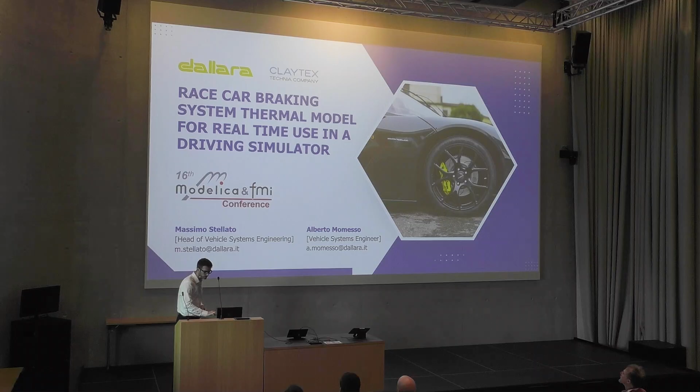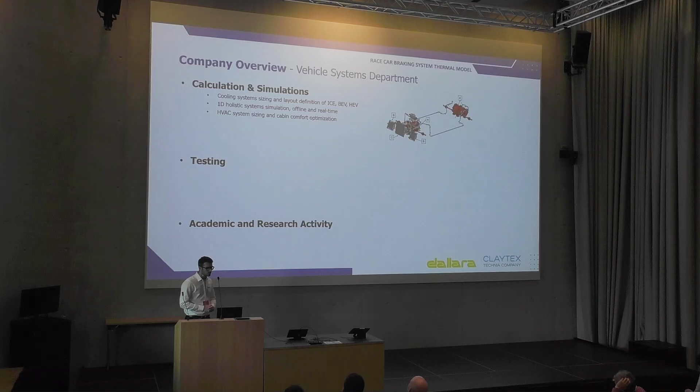So I work as a vehicle system engineer. We are mainly focused on 3 activities: calculation and simulation, testing, and research activity. For the calculation part, we mainly perform 1D holistic simulation to define the layout of the cooling system for each type of car. Then we have additional work, HVAC system sizing. Of course, the reason that I'm here, 1D brake cooling analysis, and then some 3D analysis using meshless software. Here, for example, there is a tank sloshing analysis. And lately, we also started to make some driveline torsional vibration analysis.

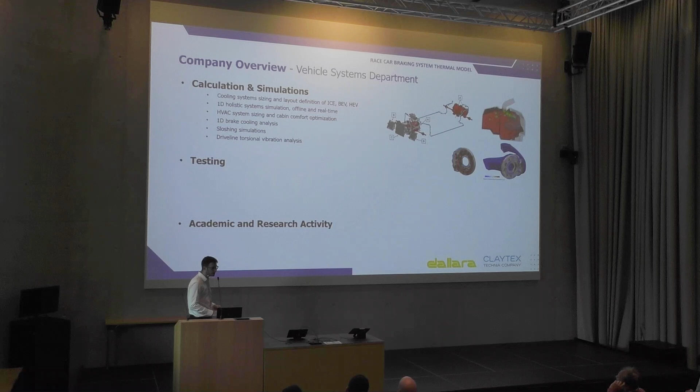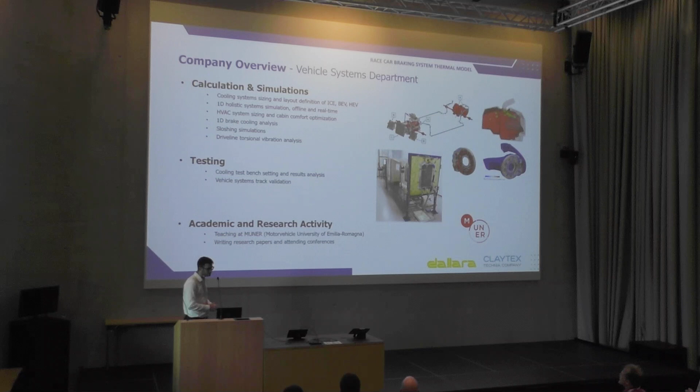For the testing part, in Dallara we have our cooling test bench, so we can perform for external customers performance measurements on water and oil radiators, and then, of course, we make some track support, track validation. And for the academic part, we teach some lessons at MUNER, the Motor Vehicle University of Emilia-Romagna, and we also write some papers and attend conferences.

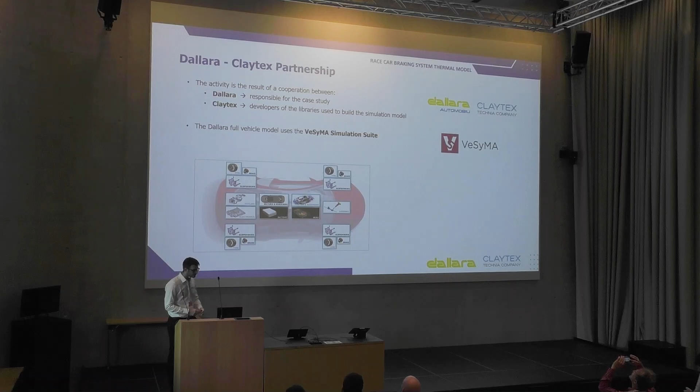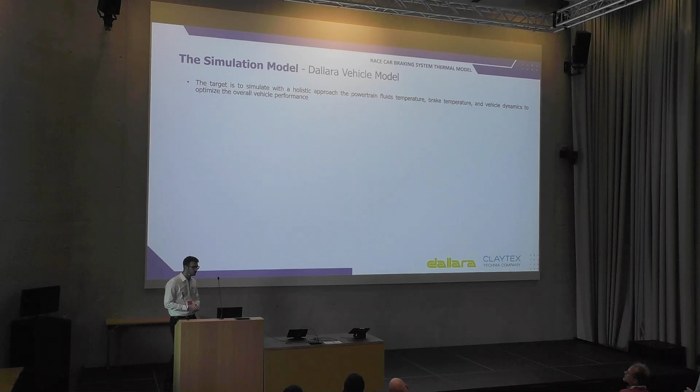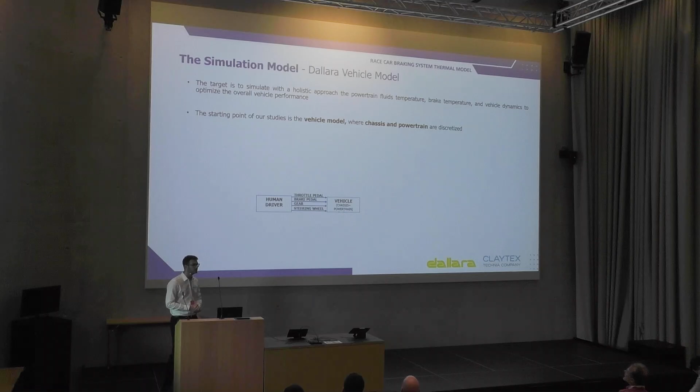Moving now to the core of the presentation, our target is to simulate with a holistic approach all the powertrain fluid temperatures, the brake temperature, and the vehicle dynamics to optimize the overall vehicle performance. That is our main target. The starting point of this activity was the Dallara full vehicle model, where we have our chassis and powertrain discretized.

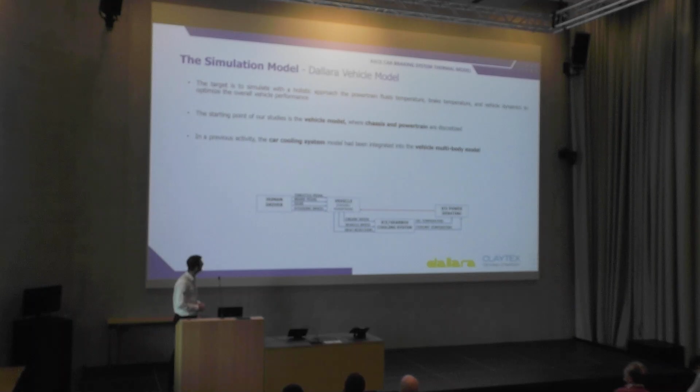2 years ago, also at the Modelica conference, we integrated a car cooling system model inside it. As you can see, we took as output from the vehicle model engine speed, vehicle speed, and heat rejection, and that allows us to evaluate the temperature for the oil and for the coolant, and this value will affect the performance according to the ICE derating strategies given by the supplier.

In this step, we also added another part, the braking system thermal model. Again, we took as input the wheel speed, the vehicle speed, and the brake power, and evaluate the disc and the caliper temperature. This, of course, will affect again the overall performance, because an increased disc temperature will decrease the friction coefficient, causing a decrease of braking power.

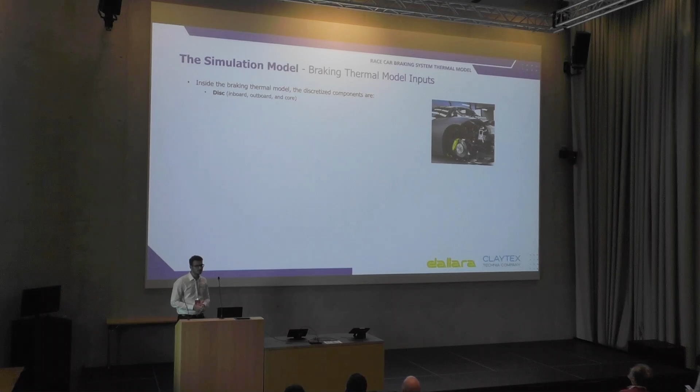So now moving to the discretized components, in the model we discretize the disc, divided in inboard, outboard, and main part, the core part. Again, the caliper, same structure as before, so inboard, outboard, and core. The brake bell and the rim. The rim is again divided in two parts, one that takes all the rim, the spokes, and another one that takes the part close to the tire.

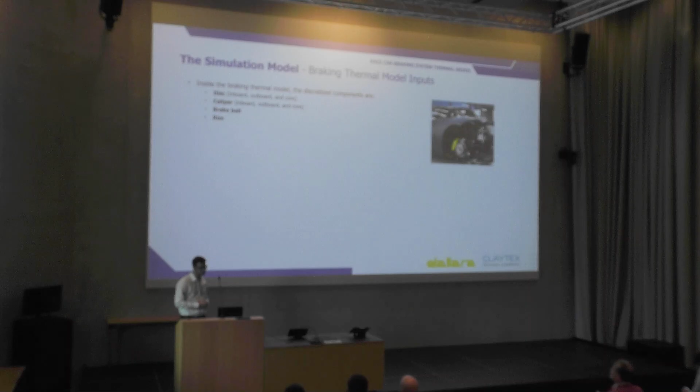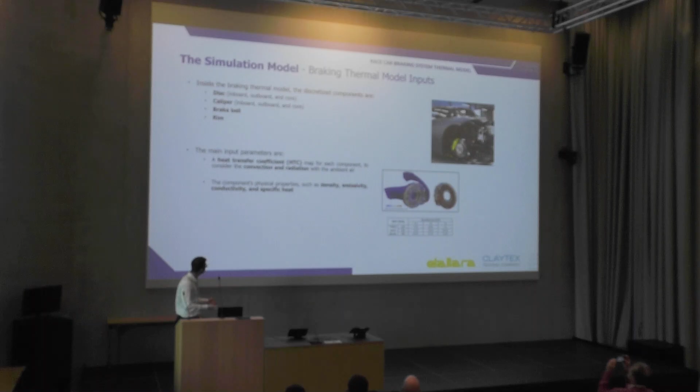Looking now at the main input parameters, of course, a fundamental one is the heat transfer coefficient map. This is something that we evaluate from our 3D CFD analysis department. This is fundamental to consider the convection and radiation with the ambient air. It's a map function of the component heat rejection and the vehicle speed. Then again, some physical properties: density, emissivity, conductivity, specific heat of each material.

Another important and crucial part is the brake friction coefficient map. This is a function of temperature and brake pressure, and is given by the brake supplier. As you can see, by increasing the brake pressure and the temperature, the friction coefficient will decrease drastically, causing a bad braking performance.

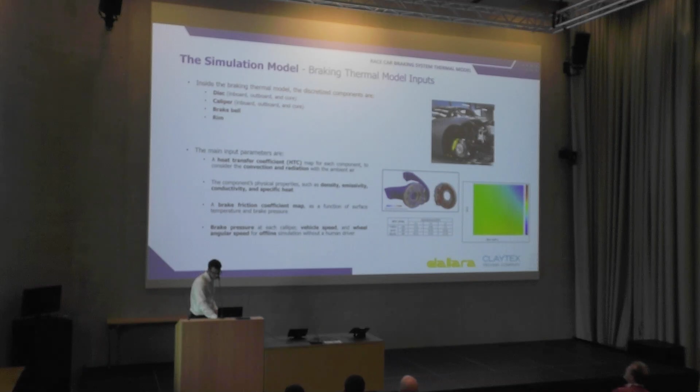Of course, this model may run offline or in the driving simulator. If you run offline, you need some input data such as vehicle speed, wheel speed, brake pressure, and so on. Now, analyzing how the model is built and the thermal discretization, we start by the evaluation of the brake power, that is the overall system heat rejection. This is the standard equation that you can find in literature.

Starting from this, our model is divided into two submodels. One of them is used to evaluate the temperature of the disc and the neighbor components, and another one for the disc caliper. So we start assigning 93% of the overall brake power, the heat rejection, to the disc inboard and outboard surface, equally distributed.

This number is empirical. We looked at some recent papers, and overall this is a value that is good. We also made simulations on several types of Dallara vehicles, and overall this value fell always in this range, so it's a good approximation.

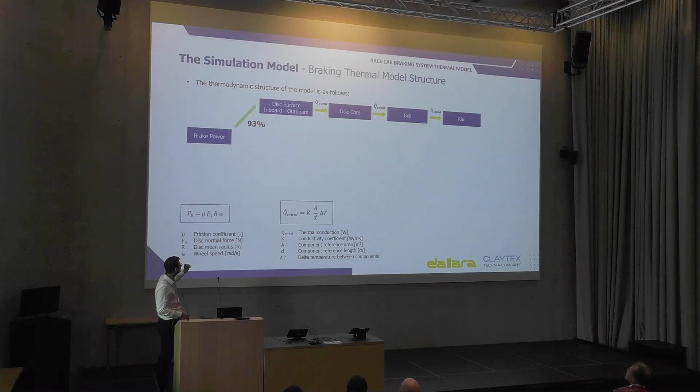Then it starts a sort of thermodynamic chain, because the heat from the inboard and outboard part will go inside the core, and then from the core to the brake bell and then the rim. So you have to consider all this conduction, and it has to be evaluated taking into account the reference length and reference area of the components, the interface between them. After this, we can analyze all the thermodynamic flux.

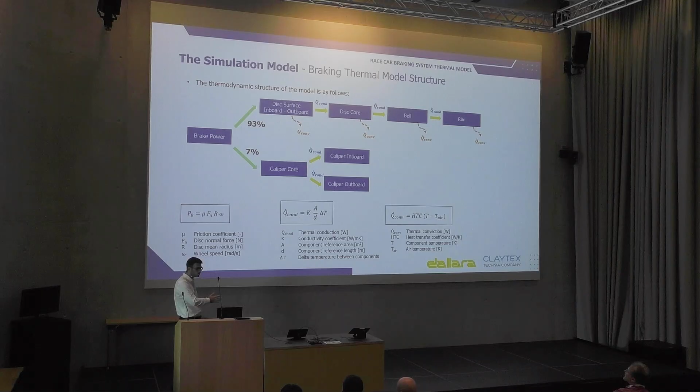Of course, each of these components dissipates heat through convection, so we have to add this part, evaluated with the heat transfer coefficient from the 3D analysis. The remaining 7% of the heat rejection is assigned to the caliper core, and then it's the same situation. From the caliper core we have conduction to the inboard and outboard part, and then dissipation through convection. Thanks to this structure, we can evaluate each component heat rejection.

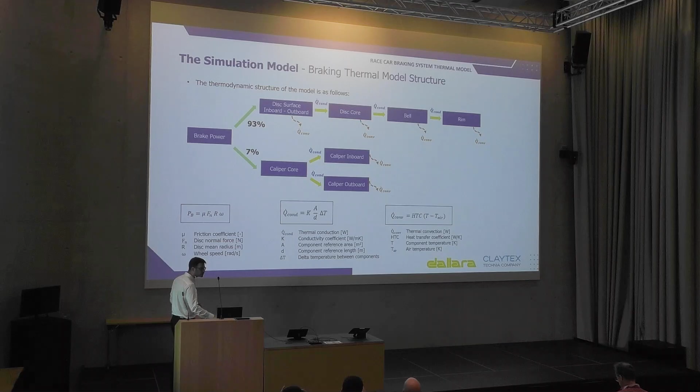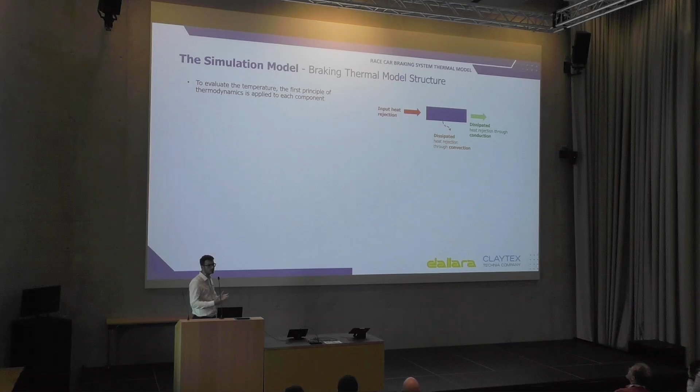After this, we can proceed to the temperature evaluation. This is very easy, because we just apply the first principle of thermodynamics, an energy balance. We have an input heat rejection coming from a neighbor component, then heat dissipation through convection and conduction. This balance allows us to evaluate the instantaneous flux, and then using an integrator block we can evaluate each component temperature. Here is the equation taking into account the thermal capacity and the heat flux.

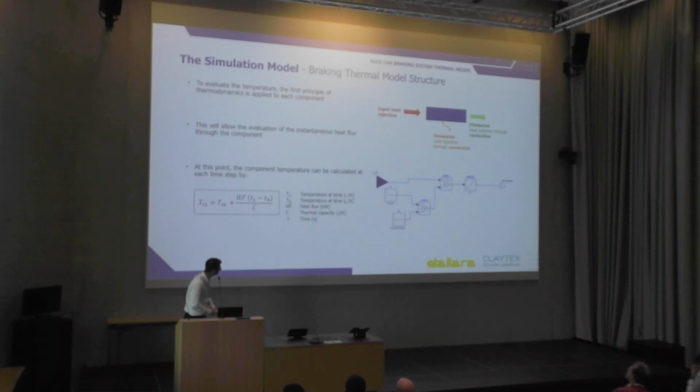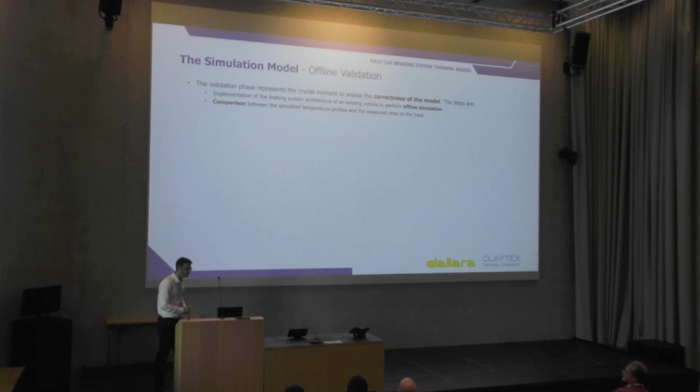Now moving to the more interesting part, the validation represents the crucial moment to assess the correctness of the model. We started taking a braking system architecture of an existing vehicle, and we compared it to the measured track data. Here is the result for the disc and the calipers.

For the disc, we had an average difference between measured and simulated of about 12 Celsius degrees, with a root mean square of 15. Considering the high range values, because we start from 400 Celsius degrees arriving to 800, this represents from our point of view a good error that allows us to size in a good way the braking system thermal area. This is for the caliper data.

Instead, here we have an average difference between the measured and simulated of 3.3 and a root mean square of 3.9. Again, this was an offline validation, so we give imposed vehicle speed, wheel speed and brake pressure, taken directly from the car sensors. But of course, we implemented

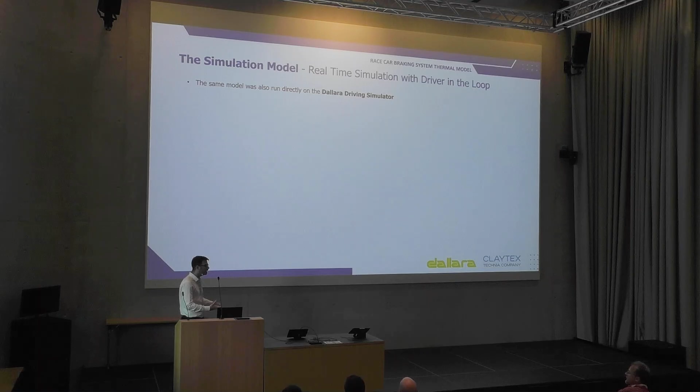the simulation model also in the Dallara driving simulator, where a driver performed a series of laps at maximum performance. This acquisition is from a hypercar with more than 1,000 horsepower, and analyzing this, we can see that approximately the peak temperature for the disc stabilizes between 900 and 1000 Celsius degrees.

There is a little imbalance between the front left and the front right temperature, probably due to the ABS system. In the paper there is also a picture where you can see the different brake pressure. And one interesting part turned out to be the friction coefficient values, because as I mentioned before, it is discretized as a map function of pressure and temperature.

And as you can see, increased temperature in the hardest braking zone leads to an overall friction coefficient degradation, which is reduced by more than 20% in the heaviest braking, 20% from the nominal value and the target value that the brake supplier gives us. Of course, the temperature in this case is the so-called end of straight temperature, so before the braking zone.

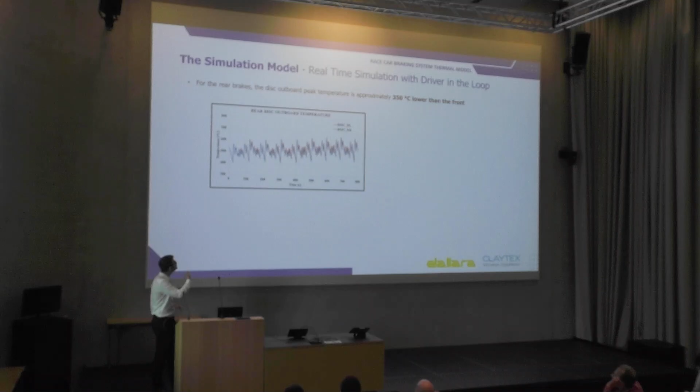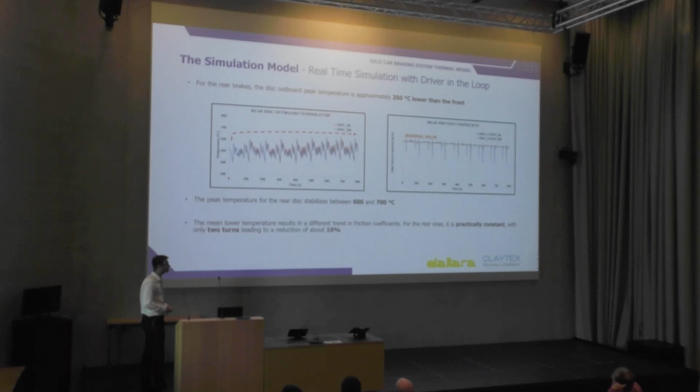The same exercise was also done for the rear brakes, and here, of course, the temperature is lower, approximately 350 Celsius degrees lower, and in fact, it stabilizes between 600 and 700 Celsius degrees. And in this case, we have a completely different trend in the friction coefficient, because of less temperature and also less pressure in the rear axle, so we have a value that is approximately constant, with just a reduction of about 10% from the nominal value.

So now I'm at the end of my presentation. Analyzing the conclusion, we can see that the simulation model has been correctly validated with track data, and it's currently used at Dallara to size the braking system and analyze the vehicle performance. This tool is also very useful in preparing a race weekend, because we can analyze in simulation different types of air duct size.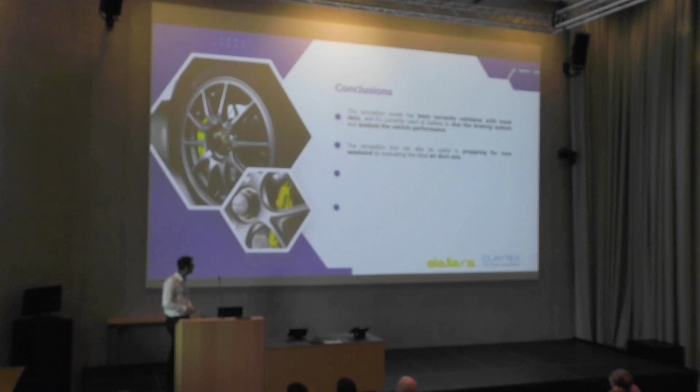Of course, the air duct size will affect the heat transfer coefficient map of the component. So thanks to this, our 3D CFD department can prepare the different maps with different heat transfer coefficients, and then we test offline, analyzing the best trade-off between aerodynamic performance and cooling effect. The duty cycle analyzed in the driving simulator was a track lap at maximum performance, but of course we can analyze different driving cycles.

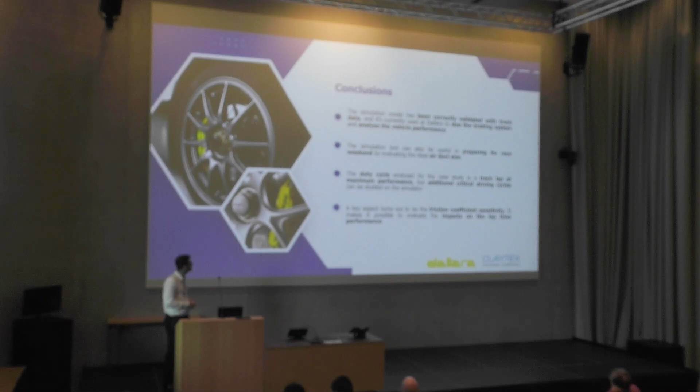For example, crucial nowadays is the out lap before a qualifying lap, or under safety car, to heat the brakes before the race start. And also one key aspect of the model turns out to be the friction coefficient sensitivity, because now it's possible to evaluate all the impact on the lap time performance.

So thanks to this, we will be able to analyze the tire temperature, having as input from our driving simulator the tire acting forces and torques, and again the rim conduction and convection. We will be able to predict the tire temperature, and thanks to this, analyze the friction coefficient between the tire and the road. This will expand our analysis, taking also into account the longitudinal and the lateral grip generated by